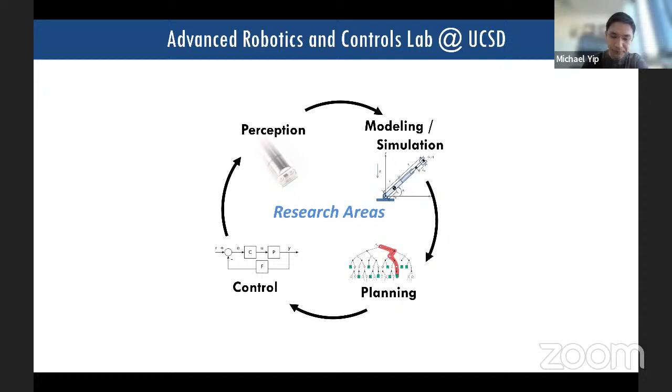A lot of it is in manipulation, and that might involve things like robots operating in the operating room, to general manipulators, to snake robots that you may not think are manipulators, but they're in some ways an untethered long chain robot arm, to also even autonomous driving.

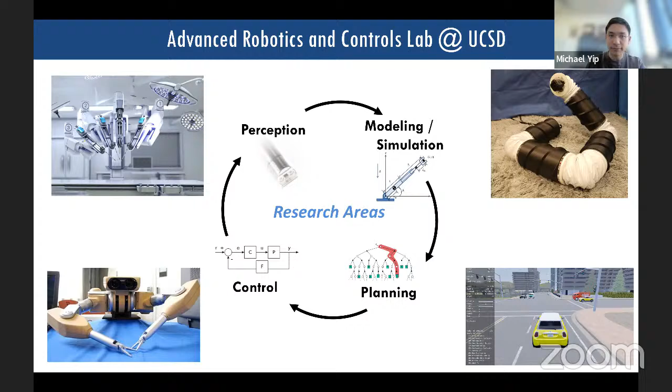But today I'm going to be talking about the motion planning component. For those who are not familiar with motion planning, it's basically a collection of methods that coordinate an agent, or in this case a robot's motion, to go from a start to goal safely while satisfying all desired constraints. So in autonomous driving, that would mean stay on the road and avoid collisions with things. The idea of the planning component is how do you get from start to goal in an efficient way?

But there are also other aspects of motion planning that can come up, like digital design. If you're designing a car engine, you have to think about serviceability and how do you get tools within certain areas to service them, or how do you assemble the product so that it can be assembled and disassembled without necessarily having various parts collide with each other or damage each other.

And of course, there's a whole excitement about humanoids and the question of how do you plan in unstructured environments, which is really important, especially when you don't have prior baked-in knowledge about what the environment might look like. And then of course, there's also digital protein design and digital actors, like in video games.

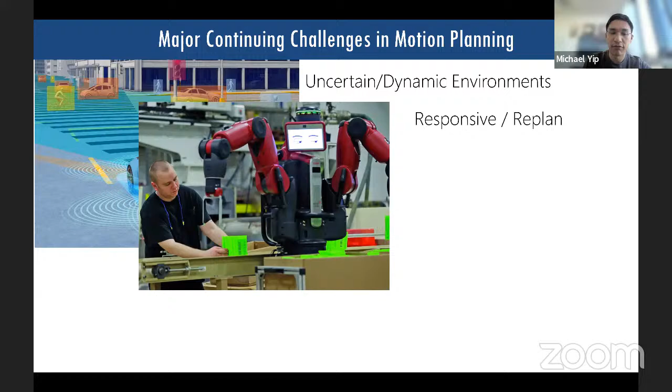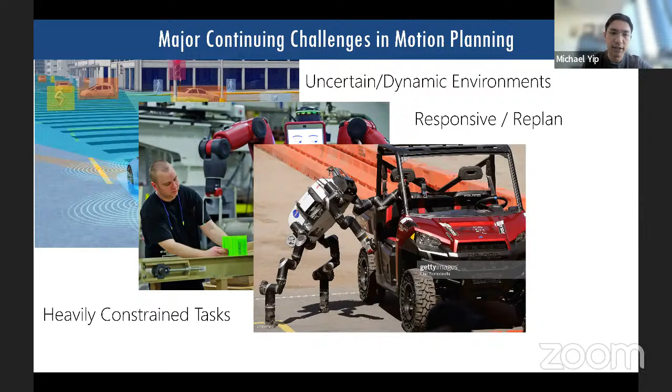There's also the problem of tasks that are heavily constrained. By constraints, we mean that in spite of there being ability to move around, there might be some inherent task constraints that force the solutions to obey some very particular set of conditions that make sample-based planning very difficult, and I'll explain that in a bit.

And then finally, also safety, time critical precision planning. And all of these contribute to several challenges that boil down to the fact that it will be hard to find a solution, and it will take a long time to find a solution.

And that's because, generally speaking, classical planners rely on this sampling approach that requires heuristics to sample in the space very generally. And the more complicated your task is, the more those heuristics tend to become less advantageous and tuned to the task at hand.

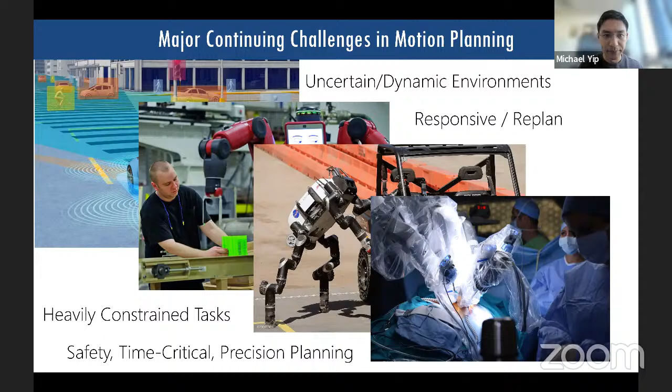And the further thing is that if you're planning in these spaces, it's often not a direct path to the goal. So the greedy approach that you might be searching in, so straight shot path or some deviation from the straight shot path, may actually not land you in the right location, and it may get you stuck.

So what has to happen right now in classical planning is that you have to, first of all, perceive the environment. Then you do this planning stage where the robot sits and thinks for a long time, sometimes, if it's a complicated environment, before it starts moving, because ultimately it cannot be sure that the greedy path is going to lead anywhere closer to the goal than the non-greedy path.

So this might take, even for a 7 degree of freedom robot arm, it might take up to a minute or two. Okay, so it's actually pretty substantial in terms of planning time in complicated environments.

And so while it's waiting, it can't really do anything. And then only afterwards will it start moving. And if the environment changes, it might be able to make small corrections, but if its entire path gets blocked off, now it has to redo that entire planning sequence.

So when we were thinking about this problem about 9 years ago, this was kind of the state, this was basically what everything was doing. And we started thinking about...

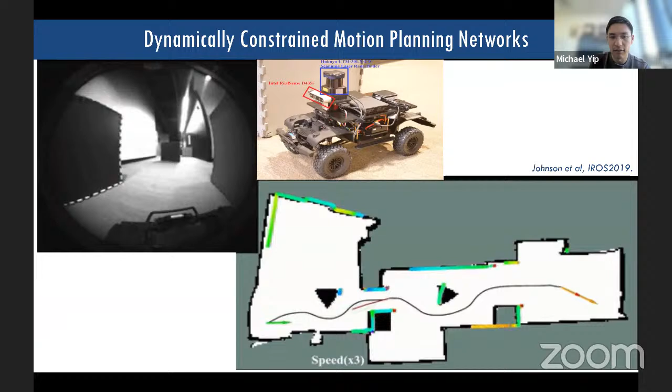We've also been able to show that it can be introduced into a model predictive control framework. MPNet combined with model predictive control can solve these highly dynamic control problems, like toy problems in this case, such as double pendulums, and dynamic quadcopter flying through obstacles.

There are also other extensions of this work towards how you plan the sequence for parking, other questions about learning tree-based search that incorporate neural planning, other kinodynamic neural planners, and several more. This approach of neural planning can be extended to use in graph neural networks, as well as other higher level, hierarchical planning approaches like motion policy networks, where you have not just step-by-step planning, but some higher level primitive to plan through.

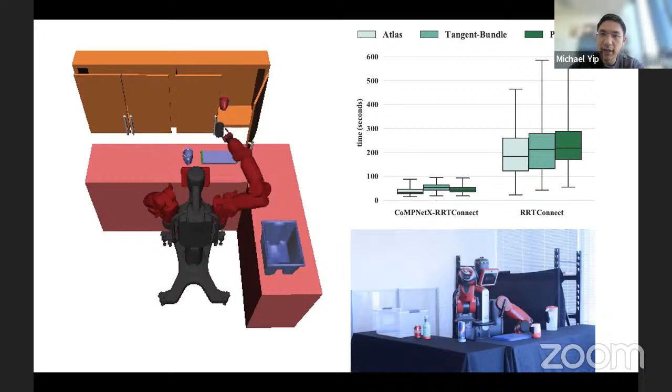Like not rotating certain open cups, versus opening a door that enforces some hinge-like constraint, and so on. This helps us solve these problems and drastically reduce time from what originally would be several minutes, up to tens of minutes sometimes, down to sub-minute planning execution.

This pathway led us more towards the idea of how transformers could help solve motion planning problems. This was largely done right up until and right before ChatGPT came out. And when it came out, we started thinking about how we could integrate these foundation models in.

One of our biggest motivations was from Facebook—this is their DETR framework. The idea we were interested in was its use of transformers to encode the non-local behaviors of patches in the scene and get a higher level understanding out from that transformer encoder, and that non-local relational encoding.

I don't think I need to go into examples of what transformers do, but this idea of self-attention gives you the same kind of idea you'd want in planning problems—knowing the influences of certain waypoints on other waypoints in a planning space, how it might affect where you came from and also where you're going. Compared to pure recurrence, where you do a step-by-step approach, it has a much stronger capability to encode this higher level understanding.

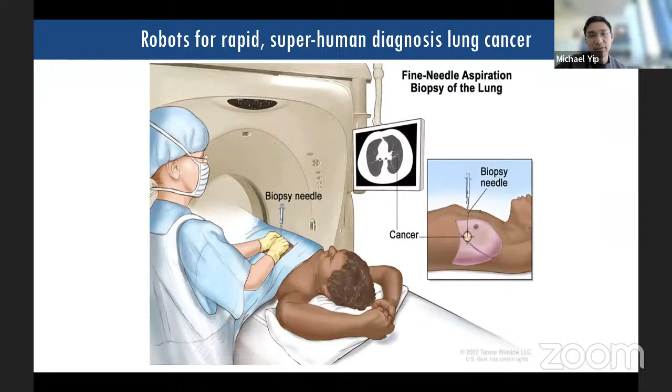Another application we've looked at for very large scale planning problems is in the medical space — in this case, for biopsy and lung cancer. We have a robot that lives within the CT scanner, and whenever it sees a cancerous lesion, it automatically plans a path to reach that lesion and pick out a piece of tissue for sampling to see if it has cancer.

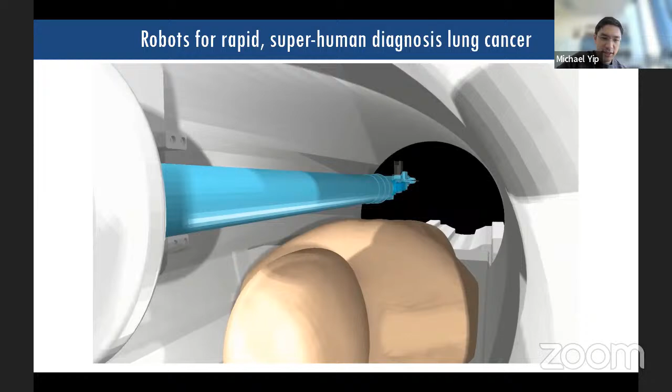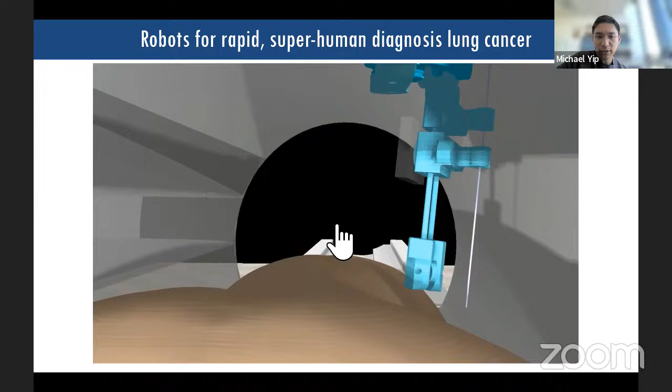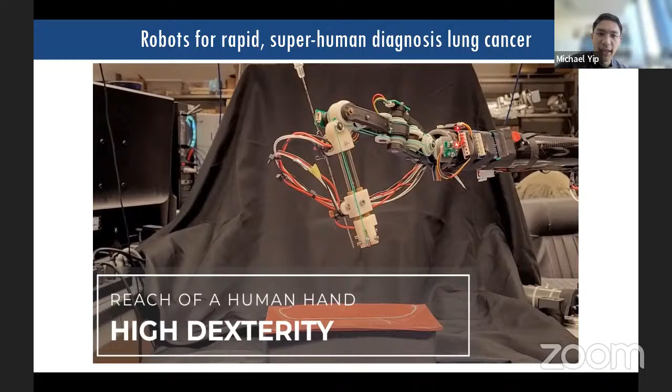This is an example of some of the hardware we do in the lab — in this case, a robot that reaches into the scanner with ten degrees of freedom, so a very high dimensional space. It has to plan itself through there, then plan a needle trajectory through the rib cage, avoiding obstacles and hitting a goal within that person's body. Here's what that robot looks like at the end effector — it's all cable driven, again a very high dimensional robot.

The problem there is to solve this in parallel so the robot can execute the most optimal, fastest path in the least amount of time while the person is being scanned, because every scan involves radiation to the patient.

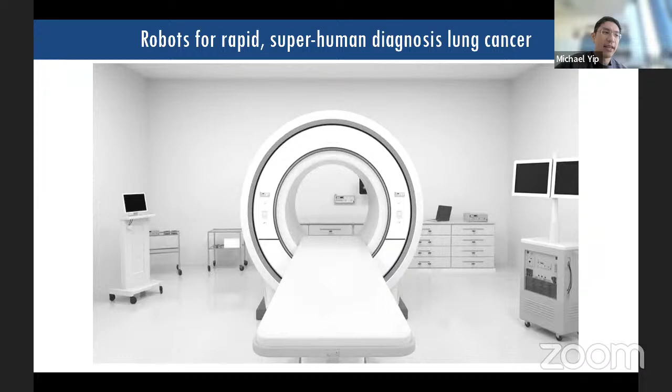Another problem we look at is the surgical robotic setup problem. When you set up a robot with many degrees of freedom that has to operate in a tight space like the human body, you face the question of the best setup for that robot. The way to evaluate that is to take all the knowledge of possible motion paths the robot can move in, and encode that into metrics for reachability or self-collision across the large scale of paths the robot may take. To evaluate this in a reasonable amount of time, we use tricks to evaluate these maps and get an idea of the ideal positioning of these high-dimensional robots every time a new patient with different anatomy comes in and changes the possible paths between start and goal.

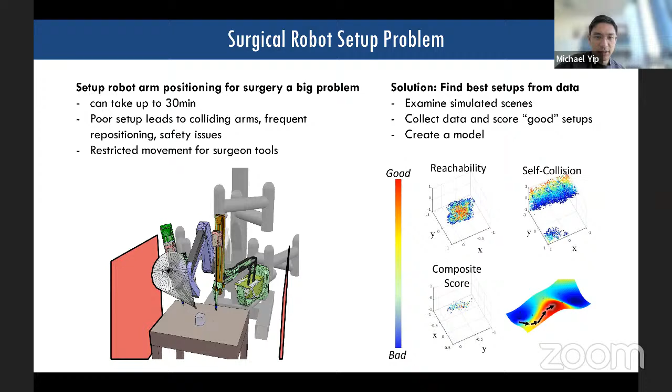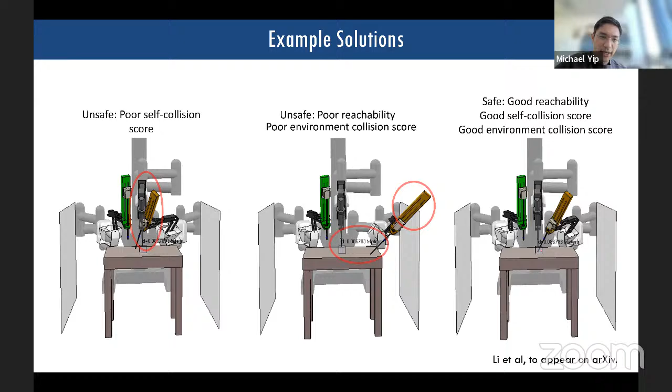Just some examples of how it can evaluate good and bad solutions. This is the idea from the previous robot, where as it enters the CT scanner, it has to evaluate its ability to plan through all possible locations in the person's torso where cancer may actually be, and position itself quickly and optimally to reach those lesions with the least amount of trauma to the patient. We can evaluate this over many different patient anatomies and scales.

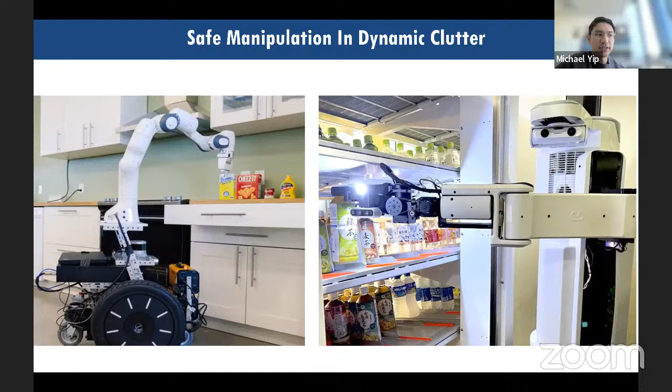Another application we've been looking at is safe manipulation in dynamic clutter. One aspect of working in a cluttered environment is that things don't stay stationary—reaching into a fridge, you're most likely going to knock into things. The question isn't whether you should avoid it, but how to be smart about it. Part of the planning problem is to understand and incorporate the knowledge gained via intermittent movements and replanning on the fly.

This idea of rapid replanning comes into play when you determine how safe it is for an object to be moved or tipped over, without knowing the center of gravity—in this case these bottles might be filled with different volumes of liquid. Via interaction, we can do rapid replanning. The innovation here is that object-centric safety helps us replan much faster and more robustly, because even though objects are dynamic and can move, if it's object-centric we can flatten all the safety estimates based on repositioning of those objects in the safety map, and have the robot replan quickly on the fly. After enough interactions with the environment, it finds a safe path through it.

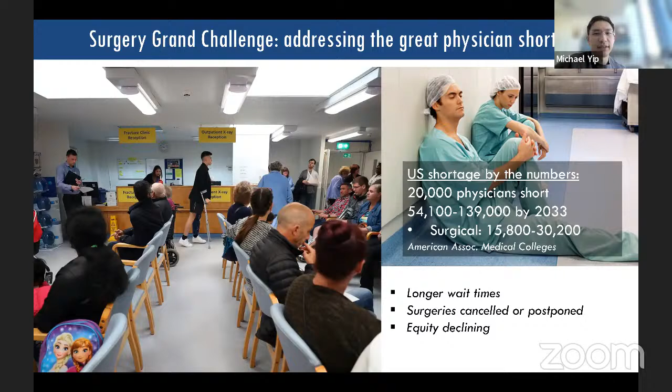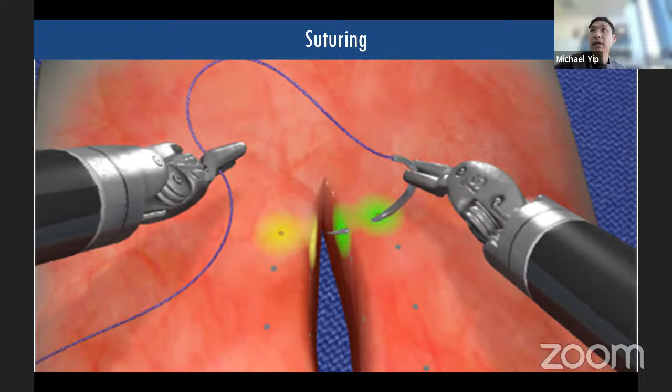So we've looked at using autonomous task and motion planning to solve the suturing problem, with demonstrations where our robot can learn the encoding of both constrained planning and open space task and motion planning. The constraint is to follow, for example, the needle curvature through the tissue, while the larger open space planning involves robot object handoffs, where you must avoid collisions between the object, the different arms, and the grasping arm. We've applied that to problems of emergency vessel repair.

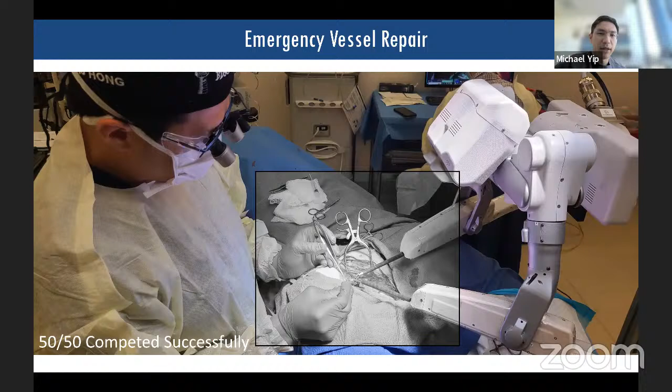In summary, learning-based neural motion planners provide autonomous navigation and enable advanced dexterity in complex places. Advancements in machine learning are doing a lot to increase the scalability, robustness, and applicability of neural planning to new tasks. There's a nice way that classical approaches and neural planners can help each other, both from an efficiency standpoint and a robustness and probabilistic certainty perspective. I think the path forward is that these two fields will both continue to contribute significantly to improving motion planning for robots in the near future. So thanks for your attention.